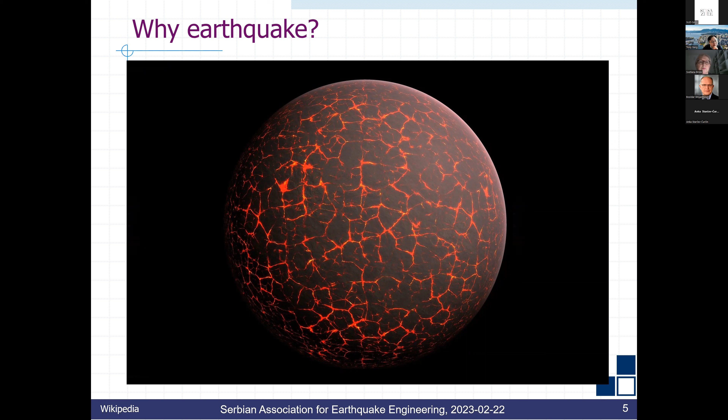Simply the Earth's core is very, very hot, and space is very, very cold. So the heat is trapped inside the center of the Earth. If today we had the technology to cut the Earth open, you would see this energy in the center of Earth constantly radiating out to space, because physics tells us heat travels from hot temperature to cold temperature, so that heat is released all the time.

Today we don't have the technology to really cut through the Earth and understand every layer underneath us, so it's very difficult to model the entire Earth. But over time, we see in some pockets of the Earth the heat gets released out to space, and that's where we have earthquake faults. Sometimes they are beneath the ocean, sometimes just right underneath our building.

So if you say, I live in a place with no earthquakes, it's not true. It's just that we haven't had the technology to detect it. In fact, some of our colleagues from Japan are predicting the entire country could split into half, east and west, or north and south direction, splitting into two parts. So prediction models are there.

Now let's take a look at a picture. This is the 1906 San Francisco earthquake. This is a real photo taken after the earthquake. It shows us how significant the natural hazard is. This earthquake completely destroyed the Golden City of the United States.

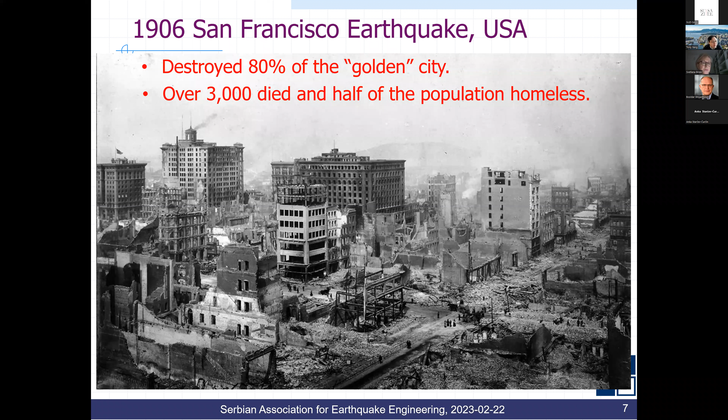You may say, Professor Yang, this was 1906, more than 100 years ago. In these 100 years, we have done a lot of good work in earthquake engineering. Yes, we have, but we have not fully solved the problem. In 2011, the Christchurch earthquake completely destroyed the second biggest city in New Zealand.

For a small population country like New Zealand, the entire second city was completely wiped out. It caused a direct financial loss of 35 billion US dollars. These are the costs to replace property loss, buildings, and infrastructure. But the indirect loss, including loss of business and the cost of human life, which we don't know how to evaluate, goes way beyond these direct financial losses. $35 billion sets back New Zealand's GDP for over 10 years.

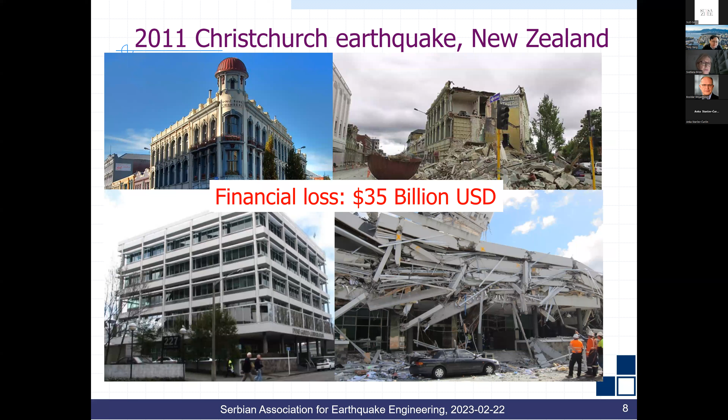Well, you might say New Zealand is a small country. Let's take a look at the 2011 Tohoku earthquake. Japan is among the countries most prepared for earthquakes, dealing with them all the time, yet this earthquake caused a direct financial loss of 235 billion US dollars. A whole sector of Japan was completely wiped out through this major disaster. No country on this planet - not the United States, Japan, China, Canada, or Europe combined - can withstand financial losses like this.

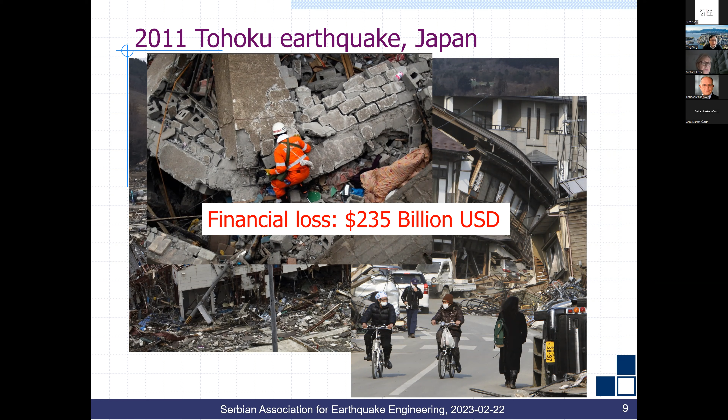So let's take a look at how we deal with earthquake engineering design today. In today's state, we look at performance-based design. We understand there are frequent earthquakes and very rare earthquakes. The idea behind it is that when you have a small earthquake, we want the building to have some damage and cracks here and there, but we want to make sure the lights still go on, the water still runs, and we can go back and immediately use it.

On the rare earthquake that comes every 2,000 years, maybe like the one we saw in Turkey, we expect the building to be badly damaged and to dissipate the earthquake energy, but hopefully it does not collapse. This is the design philosophy we have been using in North America, and probably adopted around the world. We want the building to be badly damaged, with the idea that an earthquake may or may not happen during the design life of the building.

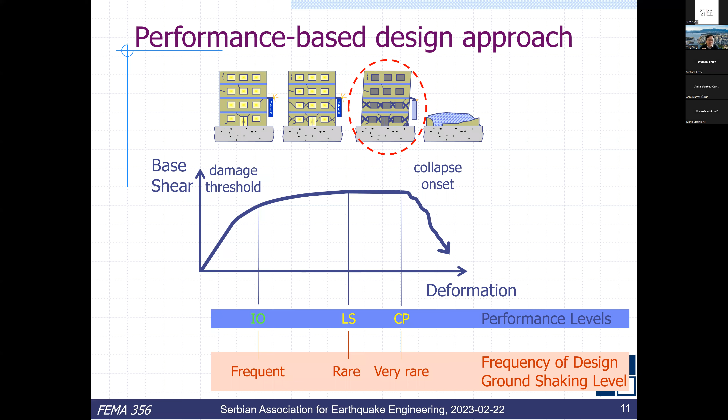But unfortunately, earthquakes are going to happen. It's not if, it's when. How good would that design be if an earthquake happens to your city?

In 2011, our colleagues in New Zealand suffered major damage. This is Christchurch, New Zealand. The casualty rate was low, but the entire downtown central business district was completely destroyed. How good will a design be? How good will government policy be if 70% of downtown is demolished? And yet many more buildings are severely damaged and need to be either significantly repaired or torn down.

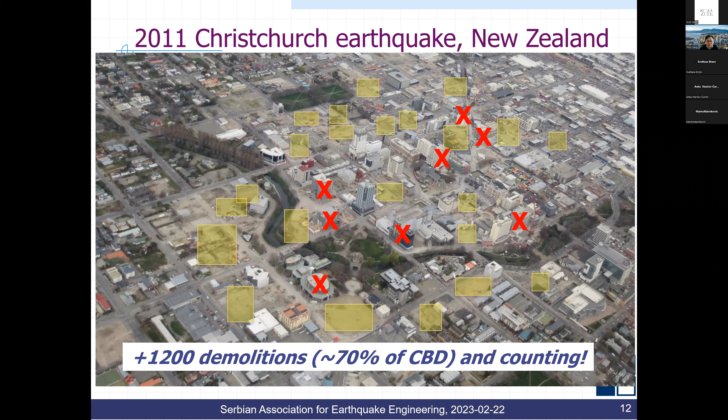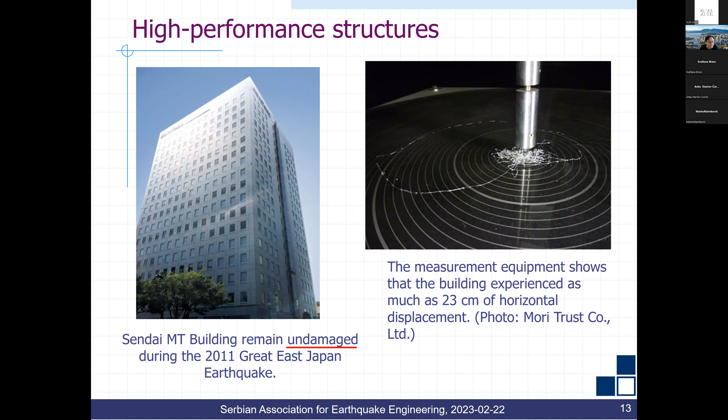There are high-performance systems which have already been developed, and it's not a sci-fi movie. The Japanese are already developing these high-performance systems. This is a building right in downtown Sendai that went through the 2011 Tohoku earthquake. The building moved 23 centimeters during the earthquake, but every glass is fine, the electricity and water are running. The building experienced this major earthquake and no damage happened. So it's not something that we cannot design for, the technology is already there.

This is another example in Taiwan, Taipei. People are selling this kind of apartment, showing luxury content with the spa and interior finishes. But what I'm very impressed about is that the Taiwanese and the Japanese consider comfort and safety equally. So they pay for expensive content, but they also pay a lot of attention to the earthquake hazard. In this building, they utilize the viscous wall damper developed by Japan, so in the event of earthquake, the building can sustain a lot of shaking without damage.

So at UBC and in many parts of North American universities, we're developing high performance systems. I'm going to show you a few high performance systems in today's lecture. One of them is what we call the steel link column frame. Maybe some of you have heard about this kind of system, maybe some of you have not.

Steel link column frame is very similar to what we see as a conventional steel moment resisting frame. Architects like this kind of structure, they have a big window, very easy layout, so you can do a lot of planning inside the building, with no bracing to block it.

But because moment resisting frames are designed to bend the beam and columns, they're by nature very flexible. During an earthquake, this flexibility causes a lot of damage to structural and non-structural components. So engineers in North America said, the architects liked the big opening, so we have to increase the stiffness to reduce the drift. So they started making the beam and column very beefy to increase stiffness while still keeping the big opening.

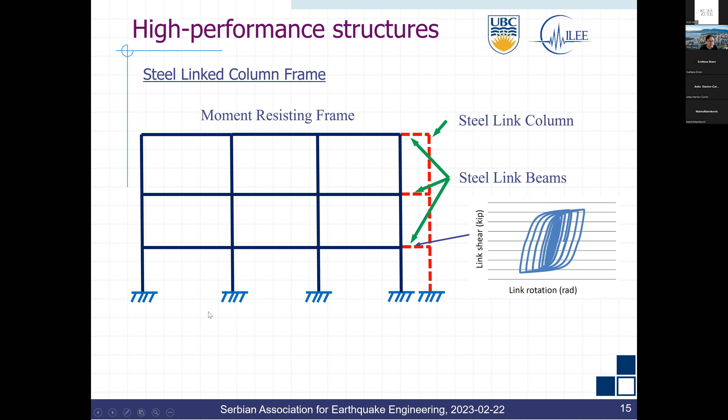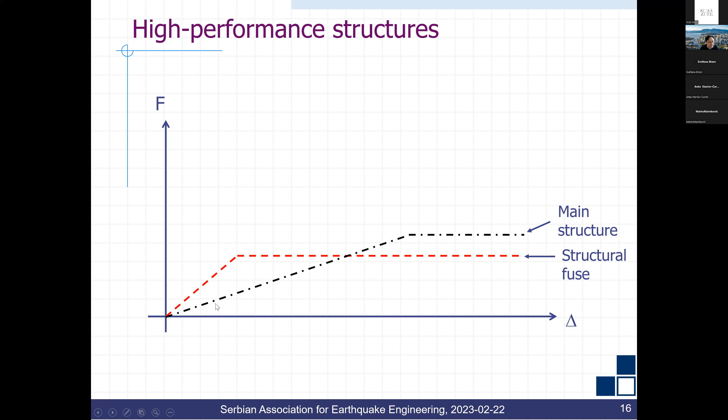If you look at the force and deformation relationship of a steel link column frame system, at the beginning you have the moment resisting frame, which initially behaves elastically and eventually, up to a certain deformation, any structure will yield. In this situation we added the steel link columns and steel link beams, where the link beams provide additional stiffness and yield earlier than the moment resisting frame. The combination of the moment resisting frame plus the link beam creates a new trilinear force deformation system, which is the link column frame system.

So in this situation, if the earthquake is actually small, between 0 and Fy, our structure will remain in this region, where both my moment resisting frame, the primary system, and the structural fuse will remain elastic.

We will call this kind of performance immediate occupancy.

If the earthquake goes beyond the Fy value but less than the Fp value, so the earthquake is within this region, then the moment resisting frame still remains elastic, but our link beams started yielding, so it dissipates energy. After the earthquake, we can go back to the building, take out the link beams and put new ones in, and the building can quickly recover to damage-free. We call that rapid return performance.

Of course, we still want to make sure what happens if the earthquake goes beyond what you designed it for, and it's very likely because the earthquake hazard is just a prediction. If it goes beyond where we're designing for, we want to make sure even the primary system has some energy dissipation so it can yield as well, to provide collapse prevention performance.

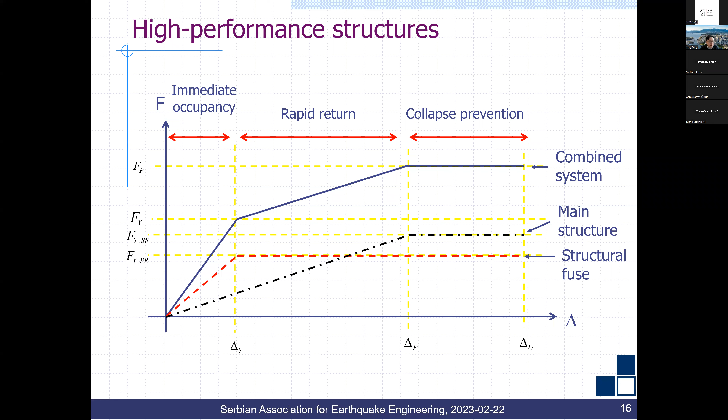So that's the trilinear force deformation performance system that we started developing for almost all kinds of the high performance systems we're developing now. Let's take one step back and look at how we do the traditional design for conventional seismic force resistant systems.

If I'm a building owner, I have to build a 4-story apartment, for example. I will hire an architect and say I would like to have X number of rooms and need to have windows. The architect will hire a structural engineer and say, please design a structure system to work for me. The structural engineer will look at the structure and pick a structure system that works.

In this situation, because there's an opening, probably a moment resisting frame will work well. It can hide around the window. So the structural engineer can pick the structure system to fit the architecture's need. With the structure system it has, the structural engineer will have some feeling about what kind of structural period it has, what kind of ductility, and what kind of overstrength the structure has.

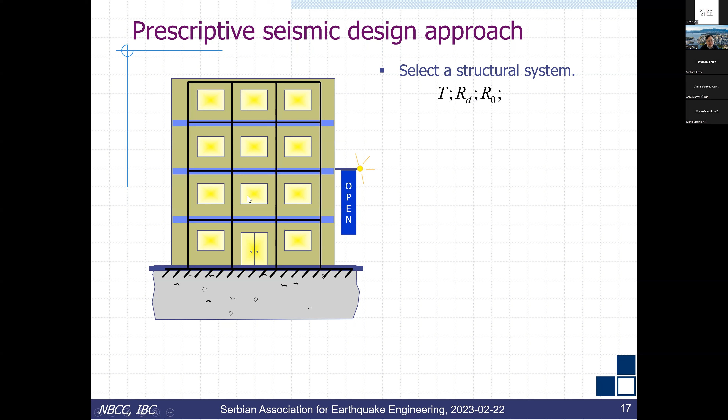Next, the structural engineer will say, okay, I'm going to design a moment resisting frame building, let's say in Vancouver, British Columbia, Canada. Then I know the seismic hazard at that site, so I know what kind of shaking the building has. Afterwards, the structural engineer will calculate, by the building code, what kind of earthquake forces we should design for. A lot of the time it will be proportional to the shaking and the mass, and almost inversely divided by the ductility and overstrength factor.

In North America, in the United States, we have a simple R factor. In Canada, we have a ductility overstrength factor, but they behave the same. Later on, the building code will teach you how to go from the design forces you have as a base shear, to distribute it over the height of the building.

With that, structural engineers started calculating how much axial, shear, and moment capacity is in each of the beams and columns. Then they will size the beam and column accordingly, and check whether the drift is sufficient, whether the structure has enough drift stiffness or not to limit the drift of the structure. If the stiffness is sufficient, then we will move on to the design. If the stiffness is not enough, the engineers will go back and resize the members until you have enough stiffness in the system and enough strength.

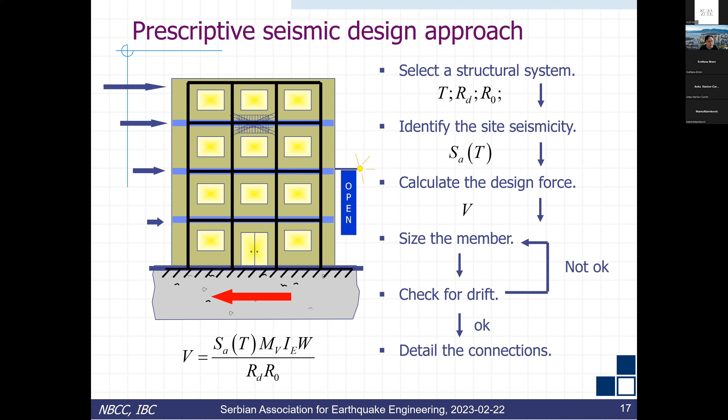Finally, once you have member sizes, then you go through detailed connection design to make sure your connection is ductile. This kind of design philosophy is what we call the equivalent static force procedure.

It has many merits, a lot of good advantages. One, it's easy to follow. Almost all trained engineers can follow this kind of cookbook procedure, designing the building from A to B to Z. It's like cooking.

I don't do much cooking, and Professor Stojadinović knows, and Svetlana knows. My wife cooked for my whole life, so I don't know how to cook.

But I assume if you're cooking pasta, you probably will boil a pot of water, put X amount of water and Y amount of pasta, cook for a certain number of minutes, and take it out. The building code is trying to do a cookbook procedure, right, to design for earthquakes. These are the A, B, C, D, E, F, G steps to follow. So it's easy to follow.

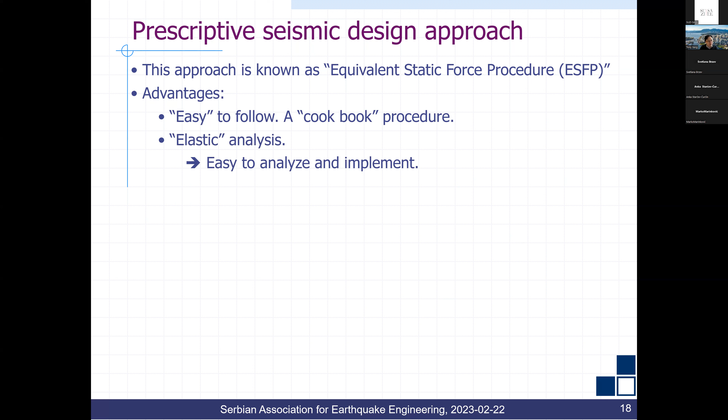And it also relies on elastic analysis, so it's really easy for engineers to do a simple model and analyze the force and deformation within the system. But it gives us a lot of questions. First of all, is the equivalent static force procedure really the right approach to do it? And if you look at this equation, this is what we do in Canada, Rd and R0.

In the United States, we simply have R factor. How are those factors defined? To be honest, those numbers are actually, I couldn't say made up, but based on experience. Engineers through experience in design know the moment resisting frame has certain reduction, ductility, and overstrength within it, so it gives you a factor to design the force. Bear in mind, earthquake doesn't know how you design your building. It's going to come with the real earthquake force. So the R0 value or the R value we use in the United States, is that really correct? Personally, I don't think it's true. So that's the first question that we have.

Second question: does the elastic analysis still apply when the building goes highly nonlinear? Let us think again. And third, which I think is very important, what is the performance of the entire building if you design through this cookbook procedure? The truth is that the performance, if you follow this cookbook procedure, is hopefully it will behave well. How well it will behave, we actually don't know. And most importantly, how do we use this kind of design approach for new systems? I'm sure there are a lot of new ideas and technology which are not part of this cookbook procedure. How do we start using this cookbook procedure in doing the design?

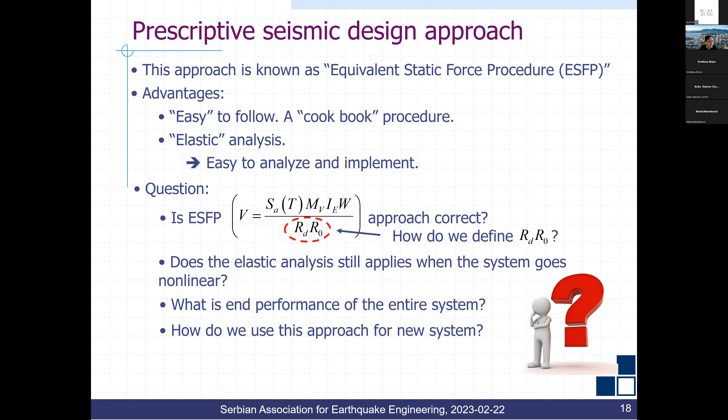So when I started thinking about that, when I came to Canada from California, I saw a lot of novel devices, rocking systems, outrigger systems out there, but those cannot be designed with a cookbook procedure. So I started looking around at all the different methods out there.

There are many methods out there, well-established methods, including EEDP, Equivalent Energy Design Procedure, DDBD, Direct Displacement-Based Design - it's my understanding that you have seen this presentation from the New Zealand approach. PBPD is from Professor Subhash Goel from University of Michigan. P-spectrum method is the one from University of Toronto, and ATC method is the one by Professor Kasai from Tokyo Institute of Technology. By the way, EEDP is the technology or design method that I developed with my team here at UBC. Among all these different methods, they all understand that we should design a structure system.

Design has to be simple. You don't want to do a complicated computer model and figure out afterward. At the very beginning, you want to have a good feeling of how the building will behave. So we started with a single degree of freedom nonlinear system.

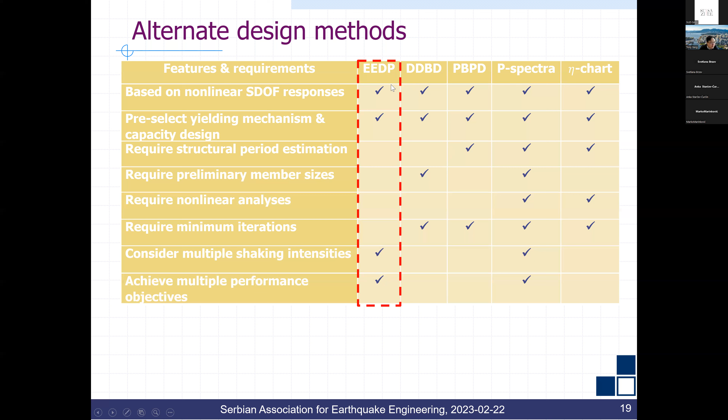So with the interest of today, I will only present to you the EEDP method, which we have published in Earthquake Spectra in 2018. This is one of the first papers we published about the design, titled Equivalent Energy Design Procedure for Earthquake Resilient Fused Structures.

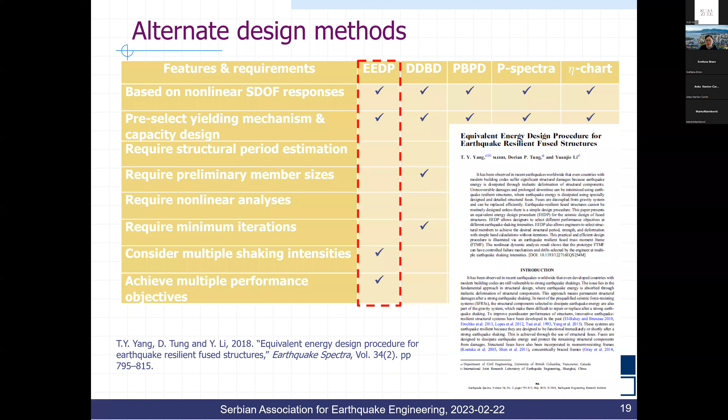If you can find it, that's great. If you couldn't find it, you can write an email to Professor Brzev, and I'm sure she can share the paper with you. So today I'm going to present to you the logic behind it.

EEDP, once again, is called Equivalent Energy Design Procedure. It's actually based on my training with Professor Stojadinović when I was in Berkeley. We're trying to do energy equivalency - the energy coming from the outside to the structure should be the energy dissipated by the structural member. So we follow an energy-based design procedure.

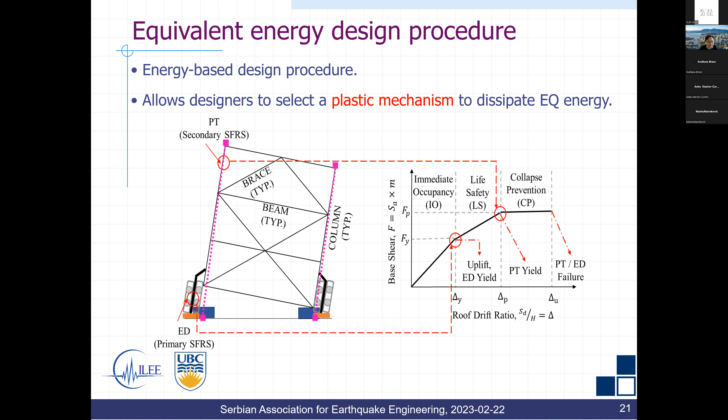We have also applied similar technology for EEDP to the controlled rocking system, where the system can rock and come back and stay, and recenter. The idea behind EEDP is to allow engineers to design the system to achieve different performance at different shaking intensities.

At a service level earthquake, we expect that the structural performance will have no damage, or very minimal damage, so you can immediately occupy the building.

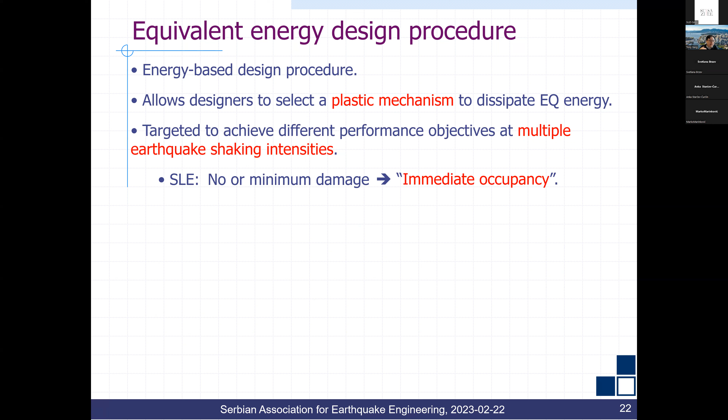At the design basis earthquake, only the structural fuses will yield or damage, where there's no damage to the main structure, so we can return to use very quickly.

In the maximum credible earthquake, we want the structure to have no collapse. So both the primary system and the structural fuses will yield to demonstrate that we can reach collapse prevention performance.

Most importantly, we want designers to be able to size the beams, columns, and braces or devices very quickly without a computer, so they can do it by hand, size the dimensions, and satisfy both drift and strength at the same time without iteration.

Because it's an energy balance method, whatever you do, you will satisfy the strength and stiffness, strength and deformation at the same time, so you actually don't need to do any iteration. So it's not a force-based or displacement method.

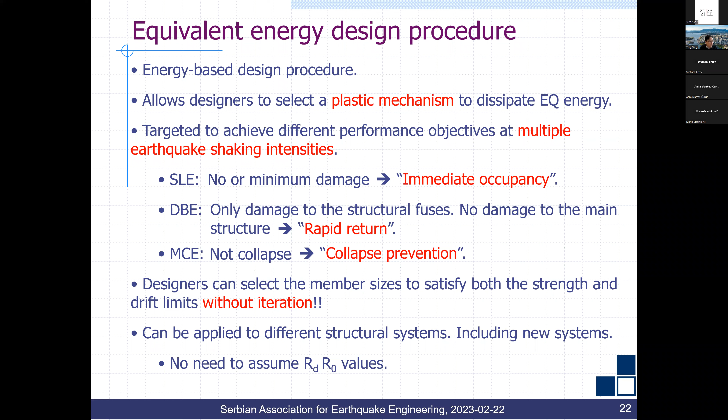It can be applied to many different structure systems, including new systems like the outrigger system and rocking system. Most importantly, we no longer need to make up assumed reduction factors for ductility and overstrength, so you can apply it to many new systems now.

So EEDP is a 7-step procedure, and I'm going to go through each one of them slowly. Professor Brzev says let's go slower today, and everything's recorded, so people can come back and review the video again.

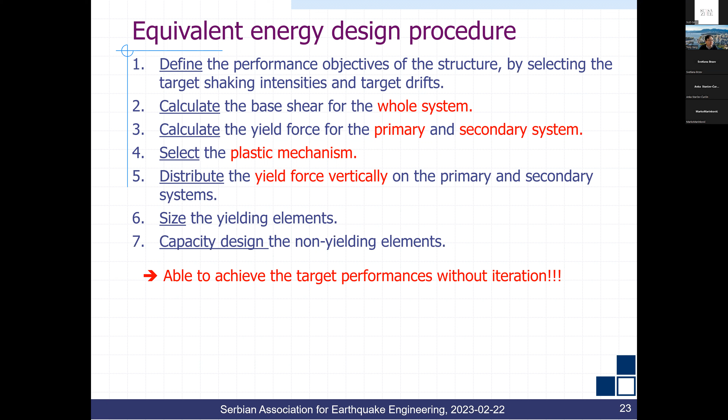So the whole idea is following these 7 steps, and you will be able to size your structure system - the beam, the column, the fuses - without iteration. So let's start with step number 1: understanding what level of shaking intensity we are designing for.

It's not difficult to find out from the building code or the owner's perspective what level you are designing for. In the United States, most people design for the maximum credible earthquake, and there's another factor, maybe 2/3 of that, called the design basis earthquake.

In Canada, we only design for the maximum credible earthquake. But right now we allow engineers to select three levels of shaking intensity: service level earthquake, design basis earthquake, and maximum credible earthquake. So if you don't know what you're designing for, you can follow the code for the maximum credible earthquake.

You can talk to your owner as well: I'm designing for your building, I want to know what performance level you're looking for. Your owner may say, I would like to make sure there's no inspection needed - well, maybe they shouldn't say that - there's no damage to my building up to a magnitude 5 earthquake. So you have a very clear performance objective: you should try all kinds of earthquakes around magnitude 5, and there's no damage.

The owner will say, I would like to make sure my devices and dampers are working up to magnitude 7, and I want to make sure there's no collapse up to a magnitude 9 earthquake. Those intensities can be defined based on the objective you're looking for, so based on that you can easily define the design spectrum.

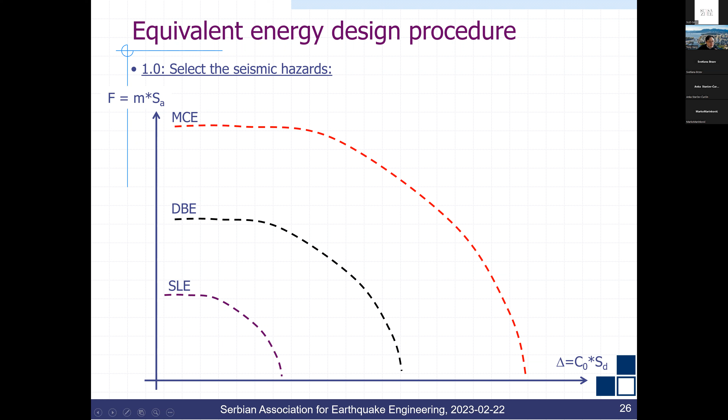Why do I do that? Because I wanted to turn this into units engineers have a good feeling about. So if the y-axis is multiplied by the mass, it represents the force the structure is seeing. The horizontal axis, the SD, if multiplied by the C0 factor - well presented in the FEMA 440 document to translate the relationship between single degree of freedom displacement and the roof displacement of a multiple degree of freedom system, everything about that is in FEMA 440 - it's a coefficient, maybe 20-30%, from your spectral displacement to estimate the roof displacement of a multiple degree of freedom system.

So now the y-axis represents the force the structure will see, and the horizontal axis represents the deformation of the structure at the roof of the multiple degree of freedom system. This is our service level earthquake. In this situation, you as an engineer already decided up to what level of shaking intensity there's no damage, so this line is well defined.

Now you want to start designing your building for that intensity, so you look into your building and figure out the maximum displacement you could put into the building so your non-structural components are not damaged. In this situation, you pick the drift where the non-structural components will not be damaged, and there's an intersection between your demand curve and your capacity curve.

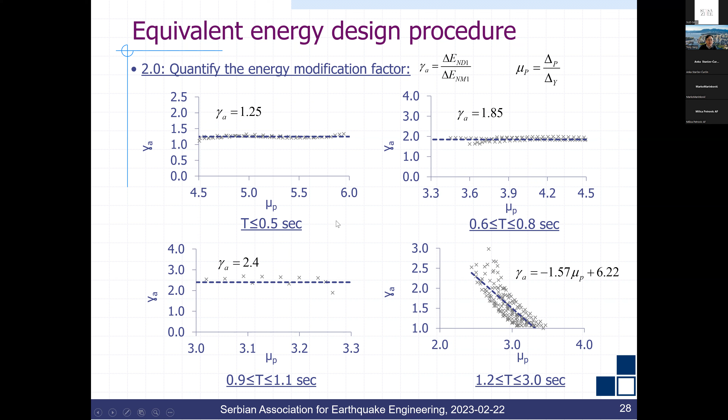In most situations, it's ductility dependent, and we can have a chart like this. So with that, this becomes a constant value that you can look up on the chart.

Now if you assume the energy will be balanced, so work done, this energy will equal this energy. In this situation, you equate the two energies, equation 1 equal to equation 2. The only unknown, because Fy you know, delta Y you know, delta P you know, is the yield force Fp.

So in this situation, by this simple equation, you select the displacement you're yielding for, you select the performance of your damper, and you can actually quantify what will be the yield force of your structure.

Once again, the earthquake does not know whether you have a damper or no damper. If the earthquake continues to the maximum credible earthquake, the story is the same. You can easily quantify the energy came from the earthquake, the additional energy, and that energy must be dissipated by the energy of the primary system to yielding.

Once again, you say energy of the primary system equals the energy externally applied, and you equate that, and you can find out what's the maximum displacement and see whether this is a sufficient design for you or not.

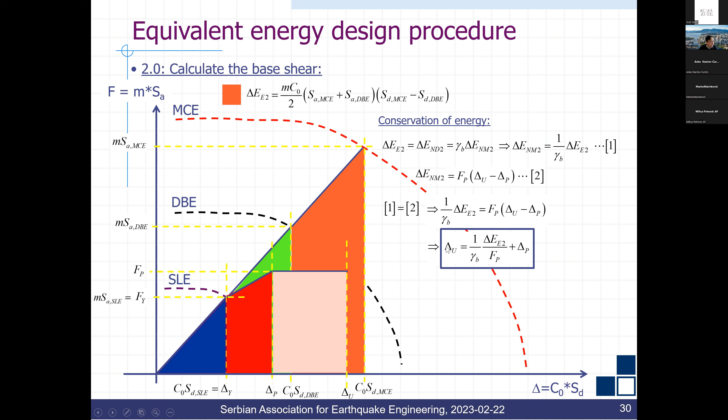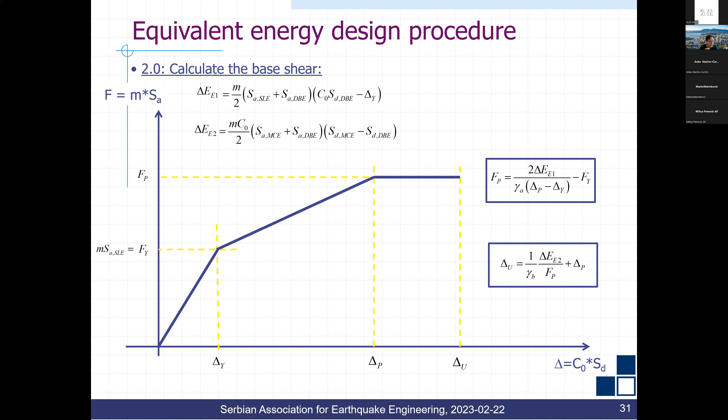So very quickly, without doing any calculation, knowing your demand, you can actually size your member and get the trilinear force deformation relationship of your system very quickly. Without any computer, you can just do it by hand because everything is things you already know. So now you have this trilinear force deformation relationship.

That's step number 2: calculate the base shear, calculated from the trilinear force deformation relationship. Step number 3 is how much of these earthquake forces go to the primary system and how much go to the secondary system. Here's an example of the force in the primary and secondary system: primary system is the forces to our damper, and secondary is the forces to the moment resisting frame, as in the example shown earlier. So in this situation, there are 2 equations and 2 unknowns.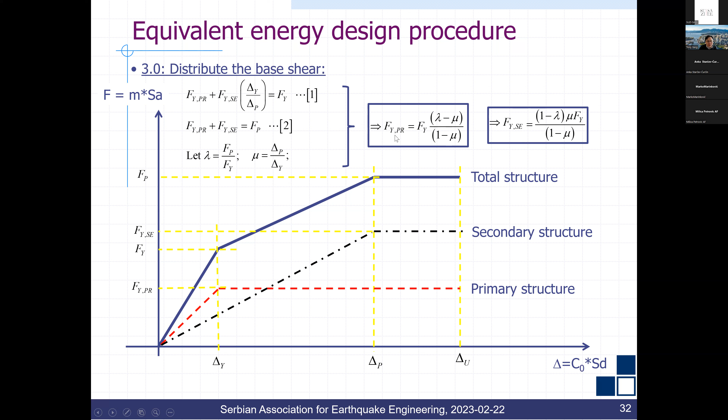This force plus this force will equal to this force because they are in parallel, and this force plus this force equal to that. So you have 2 equations and 2 unknowns. You can actually solve how much is the yield force for your primary system and how much is the yield force for your secondary system, so you can calculate the total forces to your primary and secondary system.

That's step number 4. Then you know how much goes to the link beam, how much goes to the moment frame, and you select your plastic mechanism.

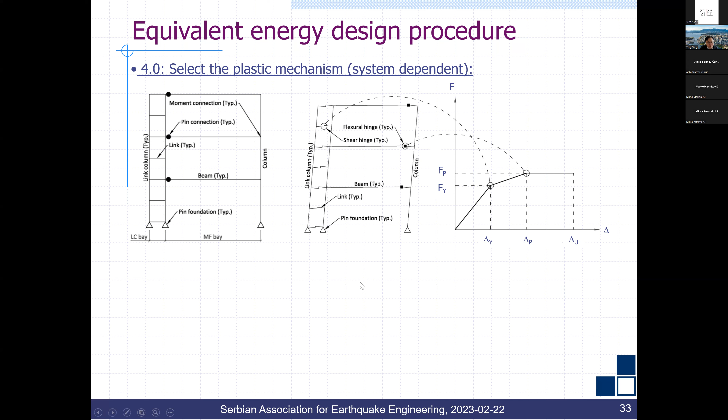Step number 5 is that you distribute your base shear over the height of the structure. There are many methods to distribute the base shear from the base to the height of the building. Professor Stojadinovic actually taught me this method when I was a student. This is the method presented by Professor Subhash Goel, where we distribute the load in a parabolic manner so that we're trying to yield all the fuses about the same time. So when I started doing this procedure, I adopted the procedure Professor Goel did.

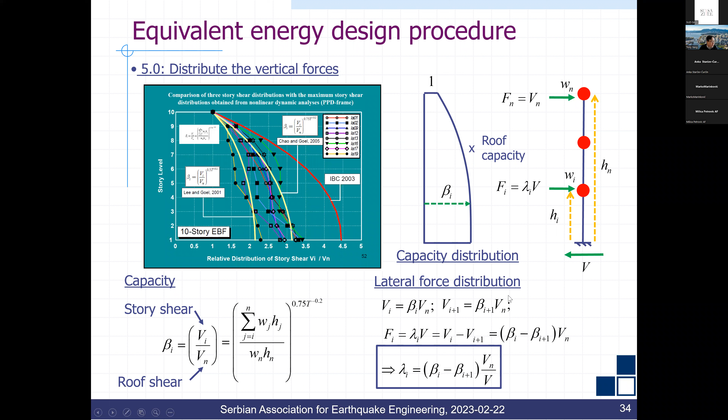So in other words, you know how much base shear your primary fuses need to take, and you distribute it over the height of the building.

Afterwards, you do the kinematic method. The work done by the external load through displacement equals the work done internally by the energy dissipated by my fuses. So work done external equals force times the displacement, the applied force times the displacement. The work done internal equals the shear link force times the deformation within the shear link. So work done external equals work done internal, and you can solve for the forces in each of the link beams.

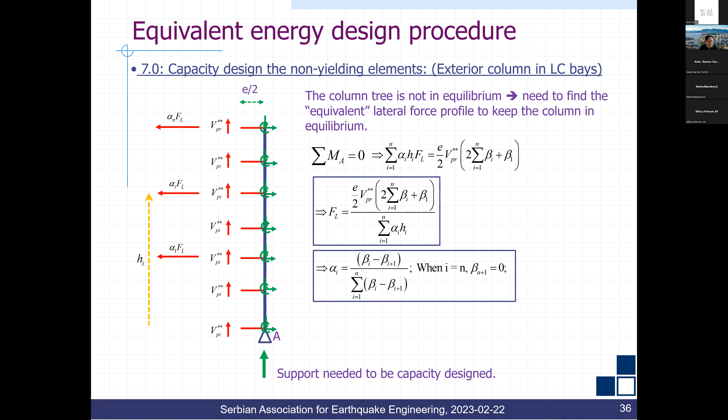Last step, once you know your link beam capacity needed, the only thing left is very similar to conventional design. You have the non-yielding element where you do a capacity design procedure, over-designing the non-yielding element to make sure even when all the devices have yielded, the non-yielding element will not yield. That's it.

So very quickly, you can size a high-performance system like the example I present here, the link column frame system that we designed using EEDP. With these trilinear force deformation responses, we size the link beam, the beam, and the column very quickly.

One thing I want to show you: at the beginning we expected the calculation from EEDP would be 0.9, but when we designed it with EEDP, choosing the service level demand and the delta SA, SLE, and displacement, our predicted calculation was 0.88 second. After we did the finite element simulation, you can see the periods are very, very close to what we were looking for. So we were very happy to see that.

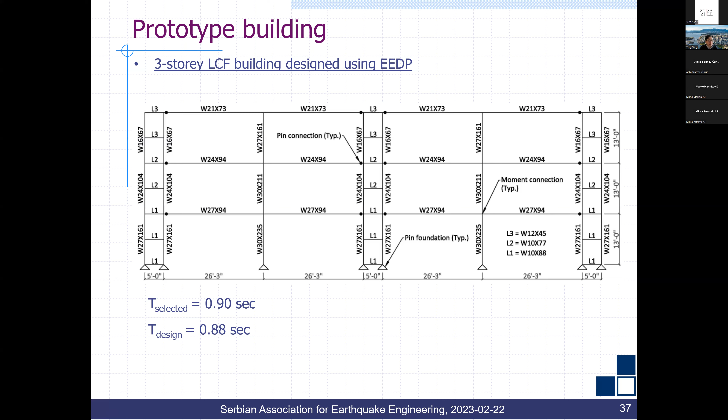Once you size the structure system, the next thing we do is see if the structure really behaved the way we intended. So we did a pushover analysis, pushing the structure with the load pattern we want, from left to right.

In the initial design, we wanted the link beam to yield around a roof drift ratio of about 0.5%, and at about 2% roof drift ratio, we allow the beam-to-column connection to yield. So we did a pushover. This simulation shows the link beam going from green to red, and eventually when the force deformation reached about 2%, all the beam-to-column connections started to yield.

You will say, wow, this is really cool. But if you think about it, of course this is the only way this building will behave, because we designed it with plastic design. We forced the system to yield at the displacement we wanted, which is why the pushover curve and the trilinear curve match perfectly.

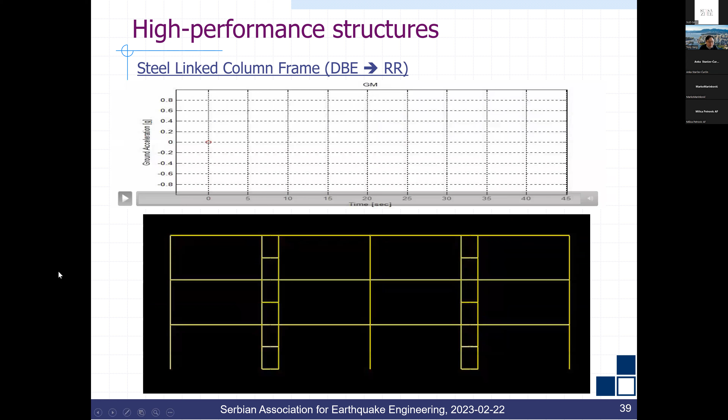That's great, but the next thing we wanted to see: you did it with equivalent forces derived by energy methods, but how will it behave during an earthquake? So we put the same model through an earthquake simulation. You can see under the design-based earthquake, the link beam started yielding, turning from green to red, but the moment frame remained elastic with no damage, because it's a capacity design.

And then when the earthquake increases to the maximum credible earthquake, you can see as the earthquake started shaking—of course this is highly animated and amplified—the link beam yielded and the beam-to-column connection also yielded. So that's what we expected to see.

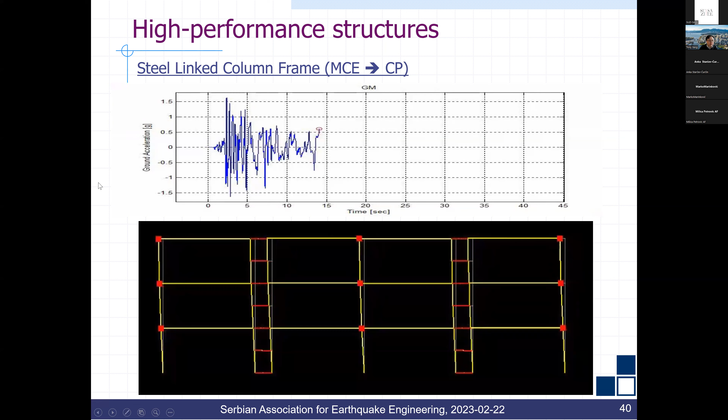We did lots of time history analysis, and we're able to show that with this simple equivalent energy design procedure, you can size the structure to perform the way you want. At the design-based earthquake, only the link is yielded, while the moment resisting frame remains elastic. When the intensity increases to the maximum credible earthquake, the link beam will yield more, bigger deformation, and the beam-to-column connection also yields.

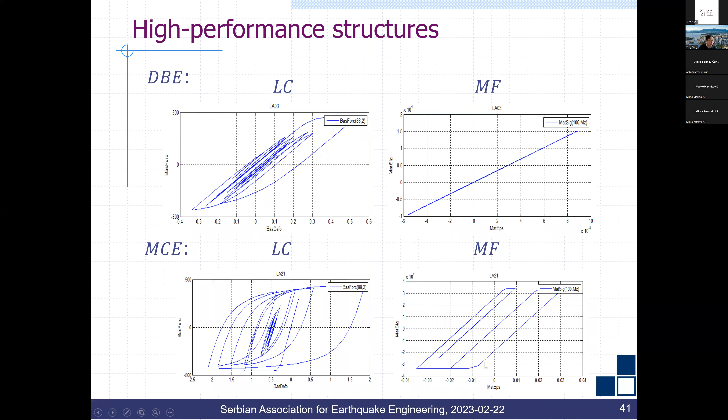We then ran lots of time history analysis—I think 50 ground motions. On average the deformation varies through the nonlinear time history analysis, but you can see this is the median response. We demonstrated that under this simple design procedure, even though the ground motions are highly uncertain, the performance of the building is very well controlled by this plastic design mechanism.

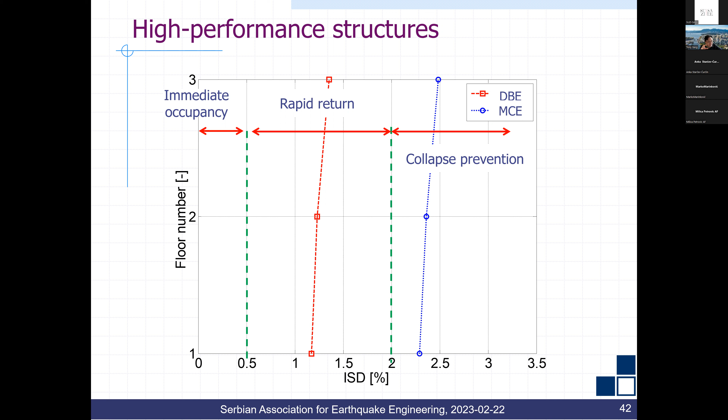Once we did that, we continued doing more and more research. Thanks to Professor Stojadinovic's introduction to Professor Subhash Goel, Professor Goyal started working closely with me on many new innovative systems.

It's a very long name—Buckling Restrained Knee Braced Truss Moment Frame, shortened to BRKBTMF. It's still crazy, hard to pronounce, but Professor Subhash Goel loved it, so I didn't dare change it. So that's the name it is now.

So why do we do that? First of all, we were thinking truss systems are very good—we see them in airports and stadiums, spanning big distances, and architects love it. They love the total openness and flexibility it gives them. If we could invent a system without columns, they'd love us even more, but we haven't figured out how to do that yet. But truss is not a great system for energy dissipation.

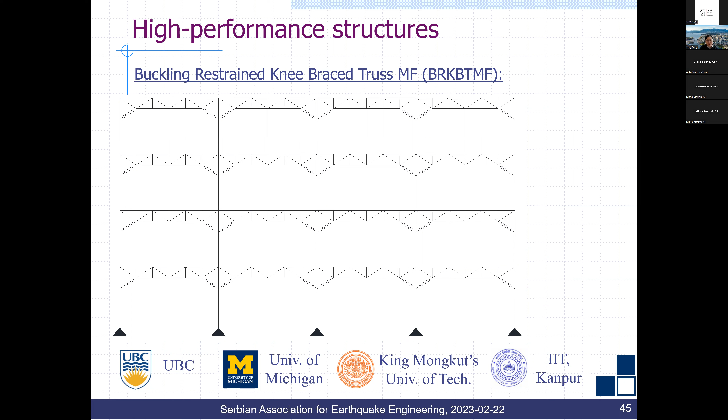A lot of the time, if the truss buckles locally, the behavior is not very ductile. So Professor Subhash Goel and I were thinking about how to solve that. We ended up developing this BRKBTMF system, where we try to utilize the truss to span the long distances we need.

But in order to enhance its seismic performance, we started developing energy dissipation devices. At that time, we didn't want to over-invent the wheel, so we started using buckling restrained braces at the corners of the frame where they can dissipate energy. And around the beam-to-column connection—the truss and column connection—we used the conventional yielding devices that Professor Stojadinovic has done a lot of research on.

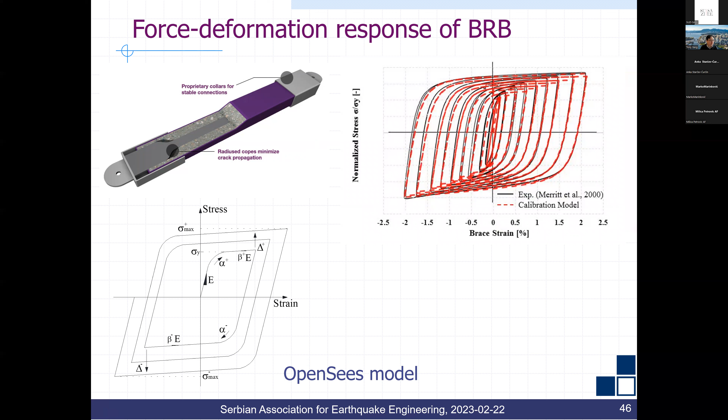So in order to first understand this, we started developing high-end computer models in OpenSees. Through that, we developed models that could simulate very well the kinematic and isotropic hardening behavior of BRBs, and it matched very well with the experimental results we saw. After we were done with that, we were very happy.

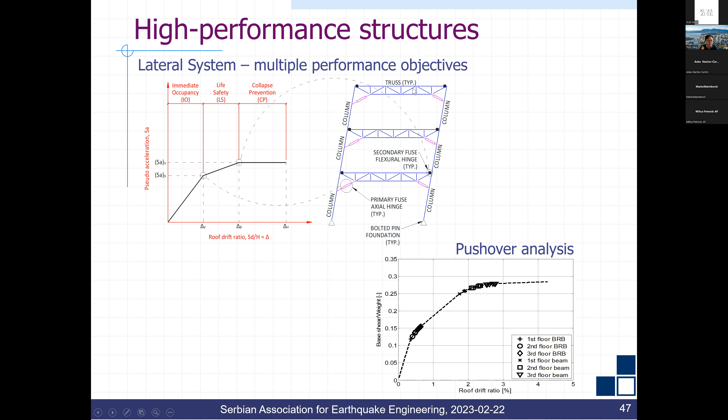We then ran a lot of time history analysis. We selected ground motions for the service level earthquake, design-based earthquake, and maximum credible earthquake.

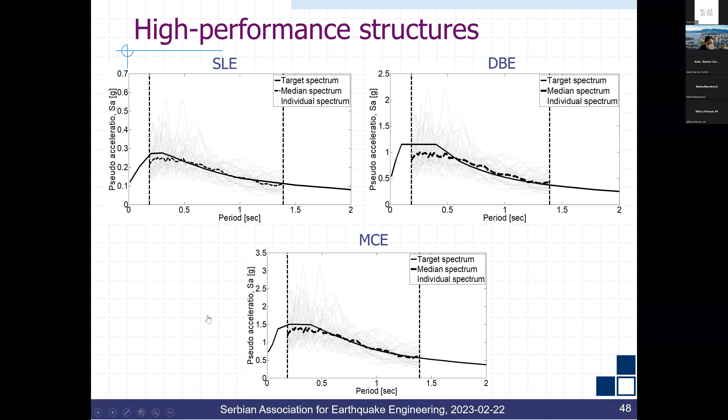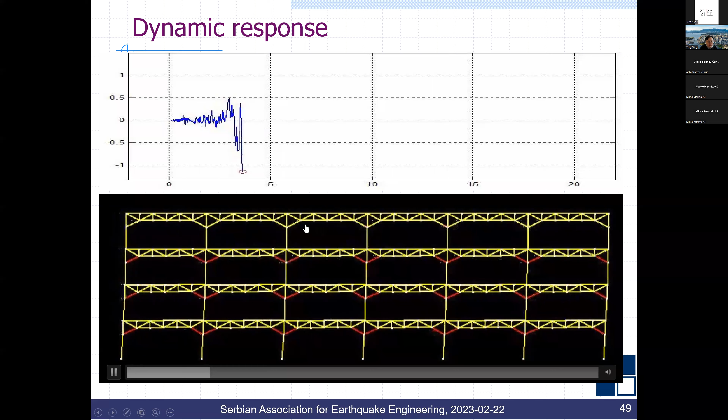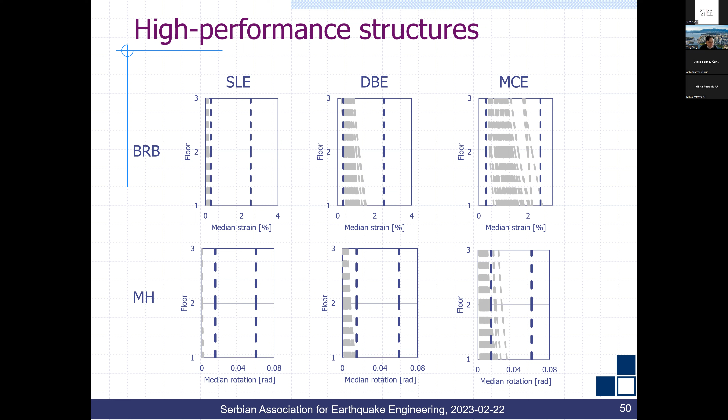This example shows that this EEDP design procedure is very simple: you size the truss, the columns, and the BRBs, then you just run it, and you will actually achieve the performance you're looking for.

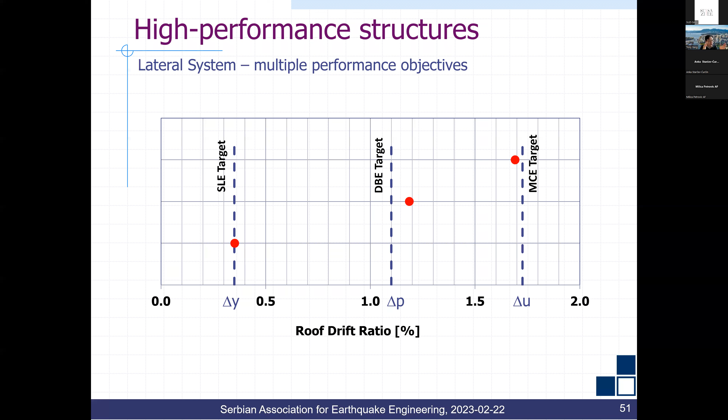Afterwards, we started doing a lot of experimental testing. In fact, we developed the hybrid simulation technology. Once again, I credit my advisor, Professor Stojadinovic, who taught me, trained me, and pushed me to develop hybrid simulation technology. We took the technology to Canada.

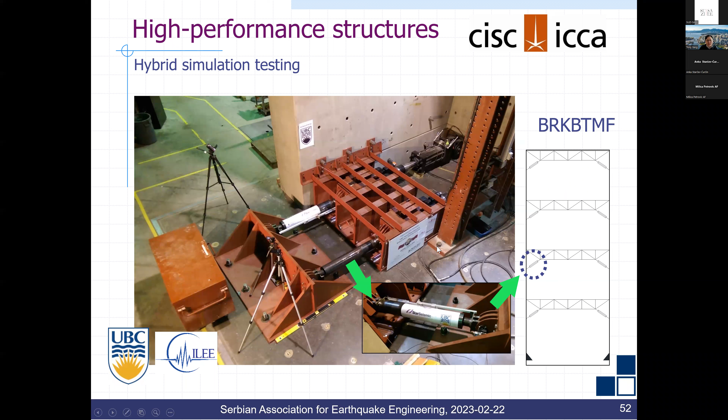The BRBs are tested in my laboratory while everything else is modeled in the computer. In the service level earthquake, the BRB remains elastic and the moment hinge remains elastic; during the design-based earthquake testing, the BRB yielded while the moment hinge remained elastic.

Under the maximum credible earthquake, the BRB yielded a lot more—it's a new BRB, of course—and then the moment hinge also yielded.

For some of you doing hybrid simulation tests—this is also the first hybrid simulation test where we developed what we call the switch control algorithm, where the hybrid simulation algorithm does displacement control, and when it sees the force or stiffness is very high, it switches to force control. So it switches between force and displacement control algorithms.

After we demonstrated the system works in simulation and experimental testing, we started working with companies in town. GTS is one of the old established steel manufacturing companies in Vancouver, and we started developing this into a lightweight, fast construction, earthquake-resilient infrastructure.

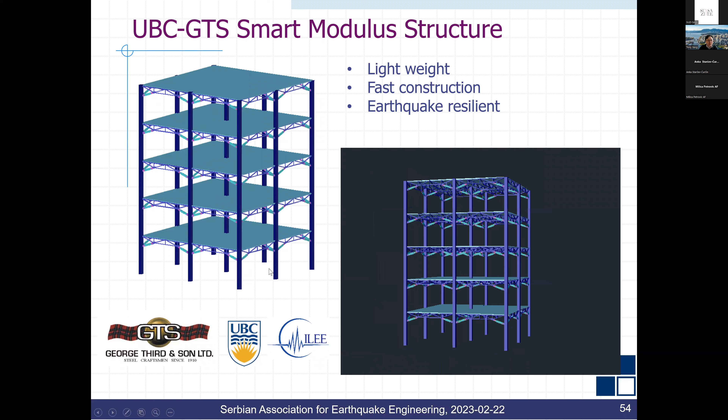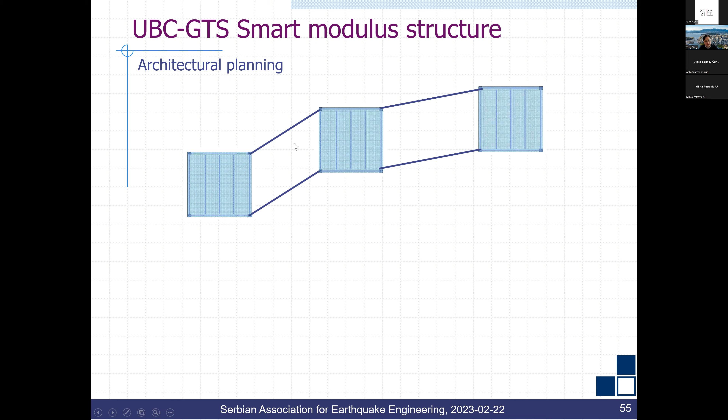The floor system—maybe I missed that—but anyway, it becomes a high performance system you can use. You can place this modular structure system in a layout and start creating very exotic buildings, like the one we see in Las Vegas.

Another high performance system I'm presenting today is about tall buildings. Vancouver has many tall buildings—in fact, when I started looking around, Vancouver has the fourth largest number of tall buildings in all of North America, after New York, Toronto, and Chicago.

So we have lots of crazy exotic buildings in Vancouver, and we want to make sure all these high-rise, tall buildings are also high performance. We initiated this research eight years ago, in 2014, and started looking into the typical structural systems used in Vancouver, realizing it's very similar to California.

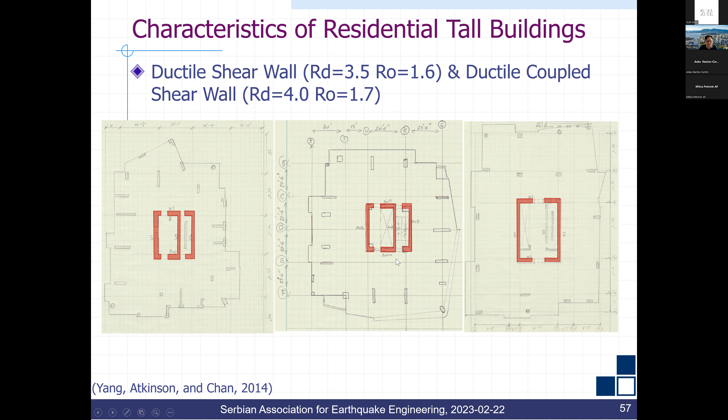We're mostly using concrete core wall for high-rise buildings. These are some typical drawings that we obtained from the city of Vancouver, the structural drawings.

This kind of structure system came from New Zealand, where the idea is that we have a link beam to dissipate energy during the earthquake. So it will crush the link beam.

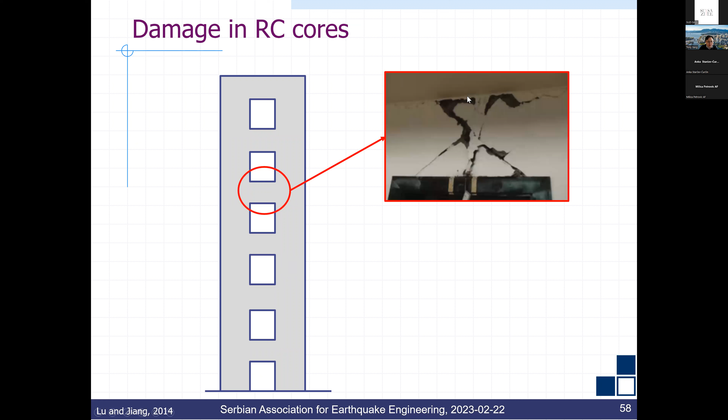In a big earthquake event, we're going to crush the base to form plastic hinging. To be honest, when the link beam has yielded and the base is forming plastic hinging in a high-rise building, there's no way we can replace or repair it, and it will lead to demolition afterwards.

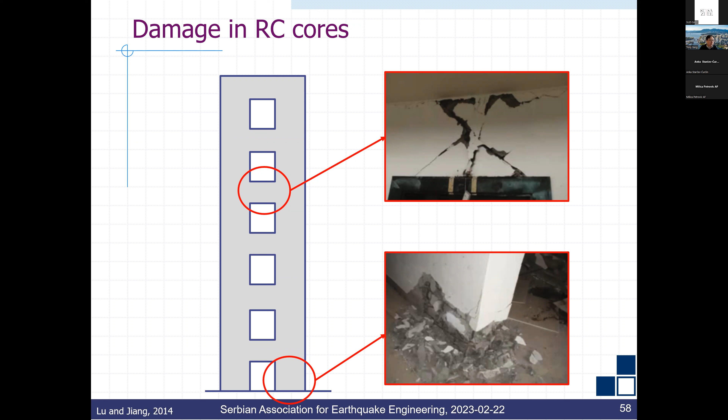So we scratched our heads and said, how do we start developing high-performance tall buildings? We started working with our engineers in town. RJC is the biggest structural engineering firm in Canada, so we teamed up with them to figure out what will be workable and deployable in a setting like Vancouver.

After many iterations with the engineers, we developed this, and the engineers gave us very clear feedback: Professor Yang, we like all these innovative systems you do, but we have to make sure it's buildable and can be used in Vancouver. One message they told me...

...the owners prefer to have concrete core walls, but we already said the concrete core walls are designed to be heavily damaged, so how do we deal with that? After scratching our heads, we developed a few innovations toward that.

First, we know the link beam is designed to yield, so we developed a new coupling beam, which is a self-centering friction-based coupling beam. It will dissipate energy during an earthquake and bring the building back to center - the high performance link beam.

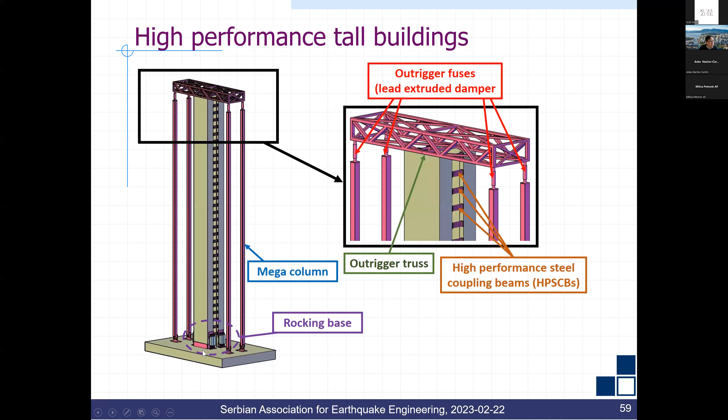We have an outrigger system, and we also have rocking devices at the base, allowing the base of the wall to uplift and come down without forming plastic hinges. We once again applied the EEDP design procedure to design the fuses, the concrete core wall, and to develop the outrigger system.

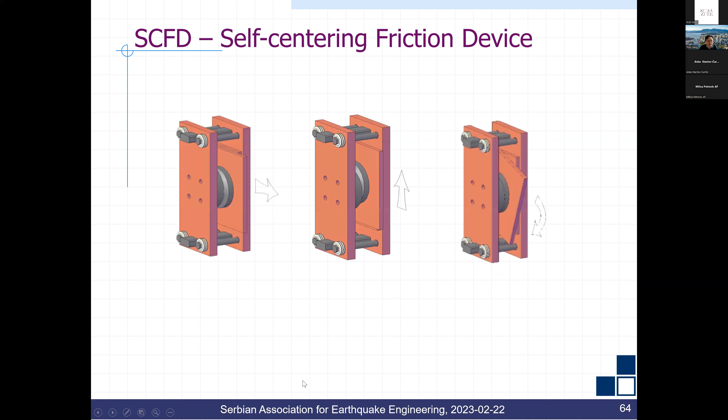We developed tons of simulations to show the behavior of the structure system. We also developed a truly innovative steel, self-centering friction-based link beam, which allows the devices to move during an earthquake and bring it back to center in all directions.

It's like a cone, male and female, that you compress, and when you start pulling it out, it comes back in all directions.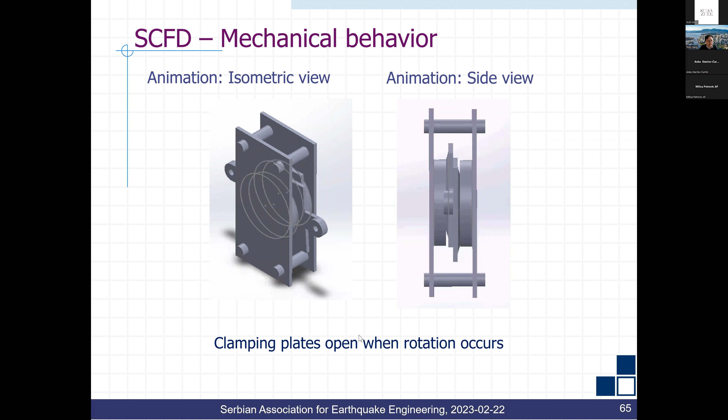We started with that design and did a lot of simulation, optimizing the curvature to come up with the shape we wanted. This shows a simple view of the cone being pulled out - because of the PT, it brings it back in all directions.

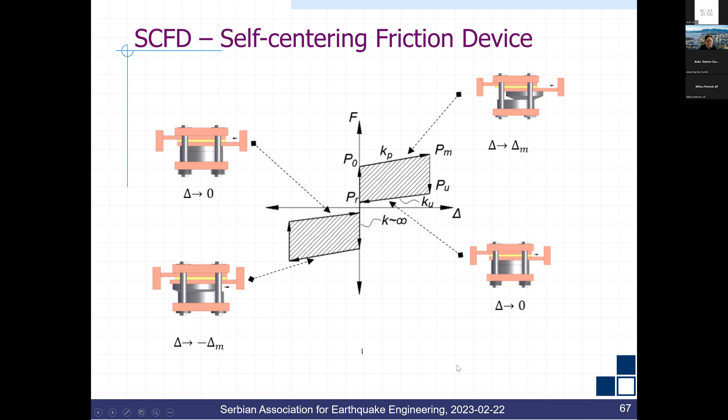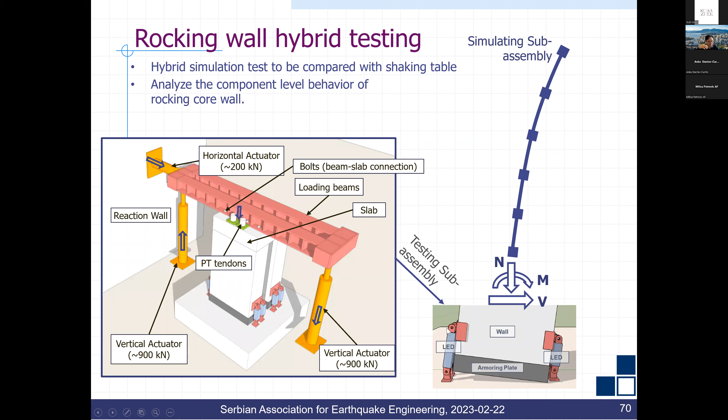We then developed an advanced simulation model to show how, without the devices, the concrete core wall would rock during an earthquake. We developed new devices at the base of the core wall to dissipate energy and prevent pounding. We used hybrid simulation technology to test those dampers while everything else is modeled in the computer. After all that simulation, we were still not satisfied.

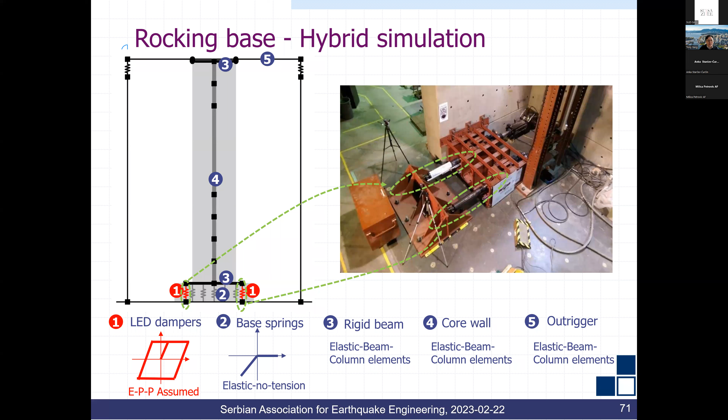So we decided to build a large-scale shaking table test to demonstrate the concept - very different from much other research. We decided to build as big a scale model as we wanted.

Our vision was a 30-story high-rise building, but we had no finance to build a 30-story building and crash it. We could scale down the model significantly, but nobody would believe it. So through compromise, we developed a 1/6 scale model of a 30-story building.

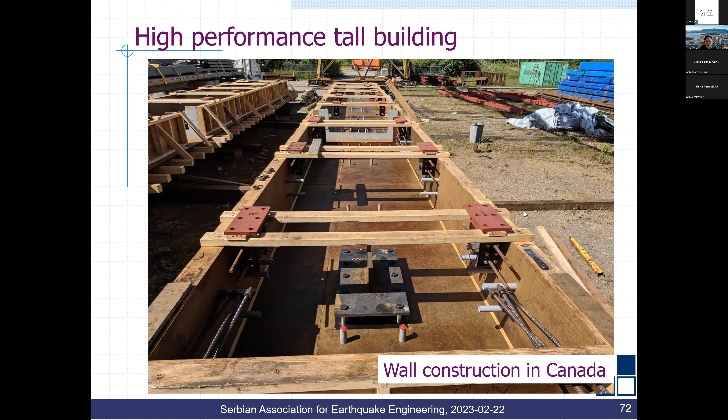It's still quite big - a 5-story building. We actually built it and developed the core. You can see our connection to the link beams, and we cast the concrete.

Something really amazing is that I don't have the facility to test in Vancouver. I happen to be the executive director for the largest earthquake center in the world now, and they have a big facility in China.

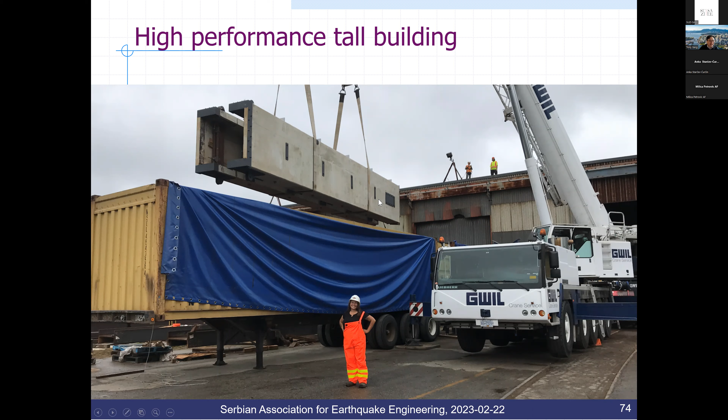So I built my concrete core wall in segments and shipped them to China, arriving at the border and bringing it to the lab. When the device reached the Shanghai border, the customs officers were blown away - what is all this about?

We say we're here to do testing, and this testing will be crushed and there's no value, and we actually go into the country without paying heavy duty.

In the big laboratory in Shanghai, where Professor Stojadinovic has been many times, we have big shaking table facilities. We bring our specimen from Canada and assemble it on the structure, putting in our link beam and rocking devices. It's a quite impressive study. In fact, this is the tallest concrete core wall ever tested, because most of the taller specimens they do are planar walls, not a core wall.

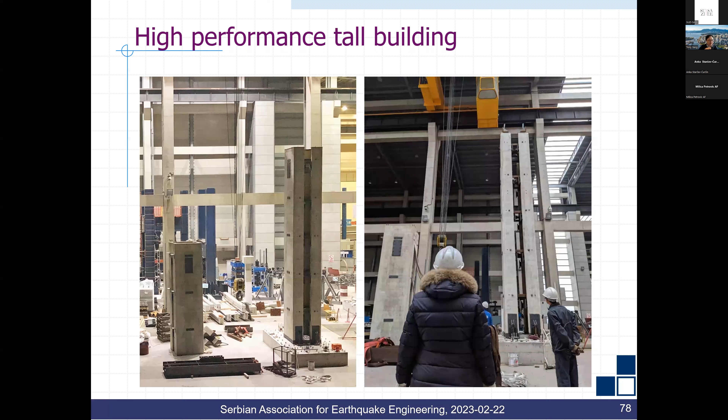The whole design was placed in the multi-shaking table facility at Tongji University. The intent is that we design the high performance system in the X direction and Y direction independently. So we're going to shake the structure in the X direction and show the system works perfectly with no damage, and in the Y direction it will be the same. We also want to do bi-directional shaking to make sure—since we designed them independently—how will they behave as a coupled system?

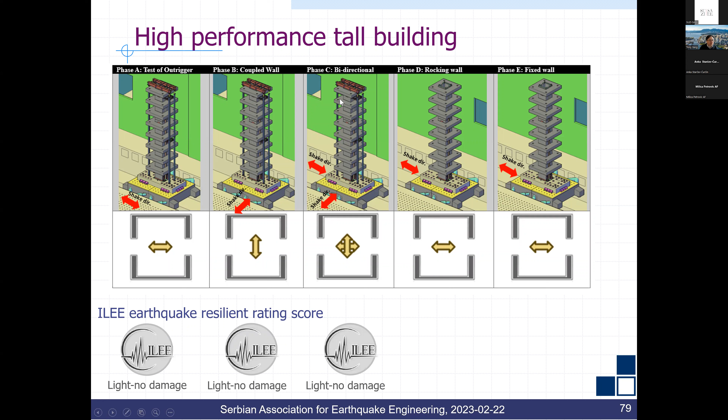Afterward, we're going to take out our outrigger system and allow just the base to simply uplift with a simple energy dissipation device. We expected performance would not be as good, but still better than locking it, with no damage to the structure or very light damage. Afterward, we're going to lock the wall down and shake it, causing the structure to have significant damage, no different than the conventional concrete core wall we've seen. So we'll see very heavy damage.

The testing, everything was getting ready to go, and COVID hit. So my team has the specimen in the lab, and it's still in the lab. We actually stopped just before the testing. As soon as the situation gets better, we'll go back and complete the test.

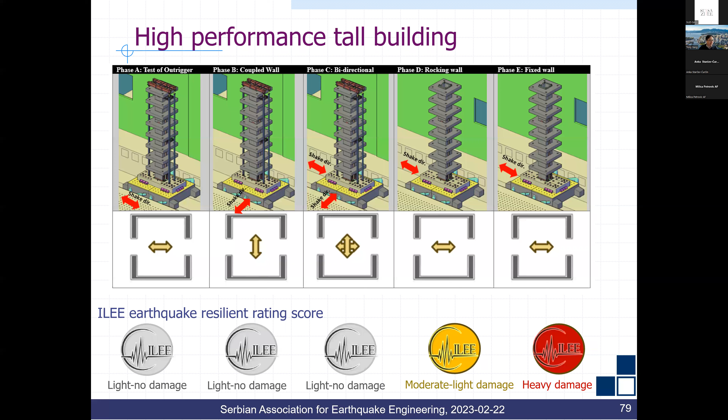So with that, let me give you some quick summary and conclusion. I'm happy to answer any questions if you should have any.

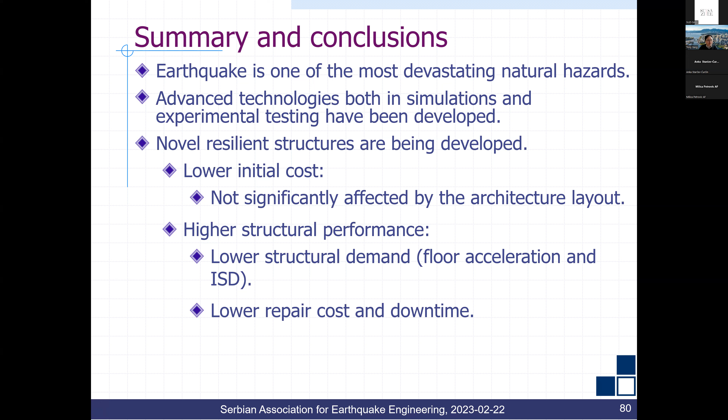First of all, I want to remind us that earthquakes are one of the most devastating natural disasters faced by mankind. Today I showed you some of the advanced technology we have developed for simulation and experimental testing, and we have already been pushing very hard in developing novel, resilient, high-performance systems. They could actually be lower cost to build because you don't need to do so much detailing anymore—all the energy dissipation is by the device. They are higher performance both during the earthquake and after an earthquake. With that, I'm pretty sure together we can start developing high performance systems that are more economical, more efficient, and robust toward future earthquakes.